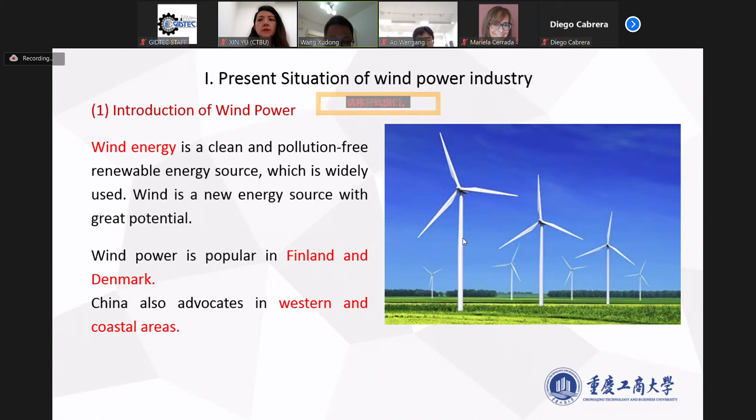In China, the wind turbine is very popular in western and coastal areas.

The working principle of the wind turbine, like the figure shows, is: the wind goes through the rotor, then the gearbox, the electric generator, and the yaw system. The wind turbine rotor changes with wind direction. So these are the main parts of the wind turbine.

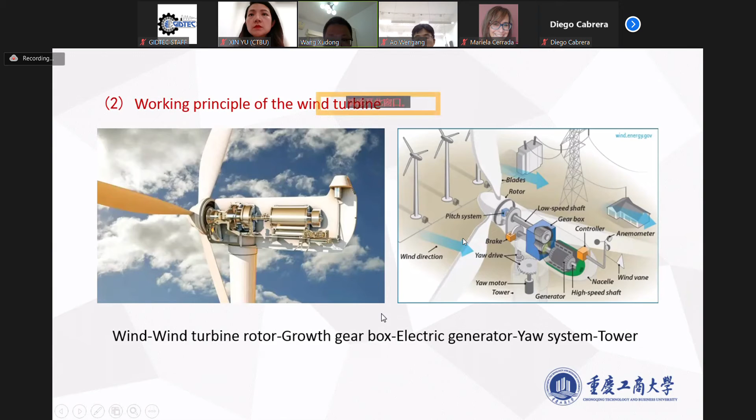The current situation of wind power in China is like this: China generated 8,000 billion kilowatt hours of electricity in 2021.

Thermal power generation with coal is the main part of the electricity, about 71% of China's electricity generation.

The second is hydroelectric power, about 14% of the national power generation. Wind power is about 7%. Nuclear power is about 5%. Solar power is about 2%.

The proportion of clean energy varies greatly in different countries. The proportion of clean energy in China is relatively low compared with developed countries, like Germany. In Germany, wind power and solar power together are about 25%, much more than China.

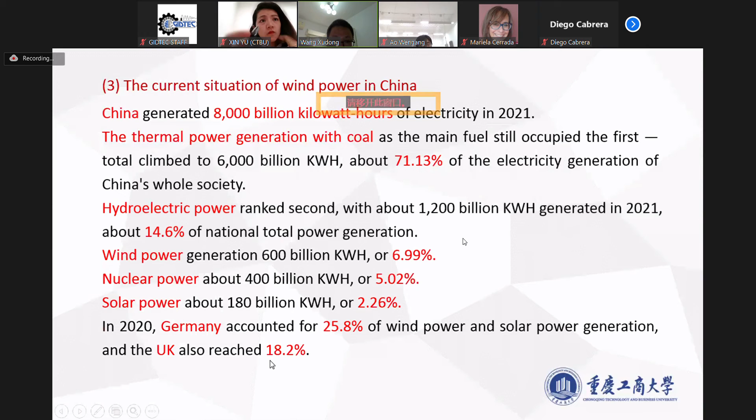In 2021, China's installed wind power capacity reached a new higher level. From the figure, we can see the added wind power from 2011 to 2021 in China, and we can see the growth is very fast year by year.

Among the new installed capacity, onshore wind power accounts for about 70%, and offshore wind power added 25% of the new installed capacity.

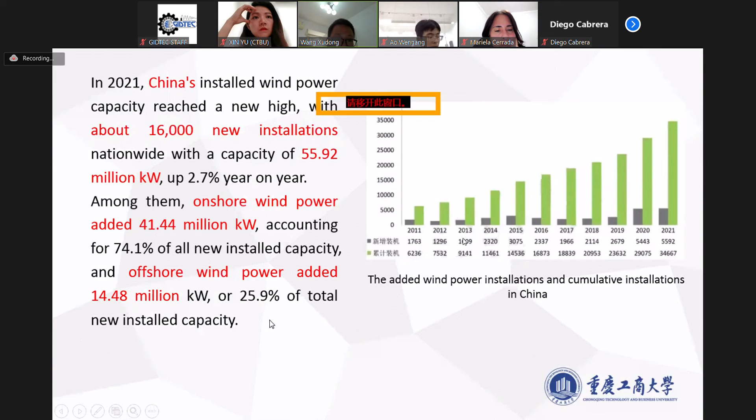In the second part, we will discuss the development trend of the wind power industry. First, I will talk about the global energy development trend.

From the Global Energy Outlook 2022, we can see that there are more energy policies aimed at improving energy efficiency.

In the Global Energy Outlook, it is very obvious that solar and wind power will play a very important role in energy and climate goals. In the long-term projection, we can imagine fast growth in both solar and wind sources.

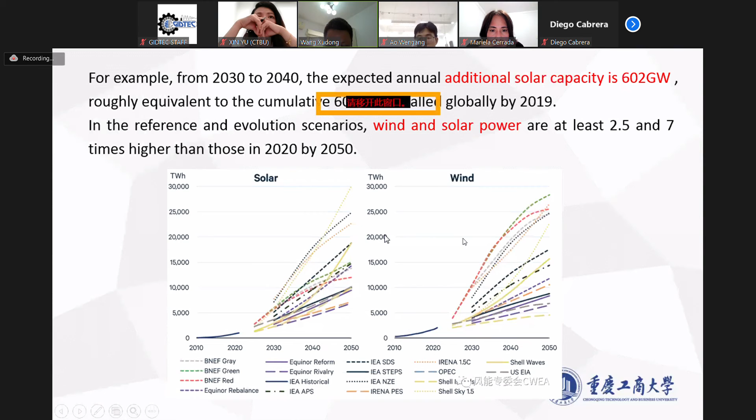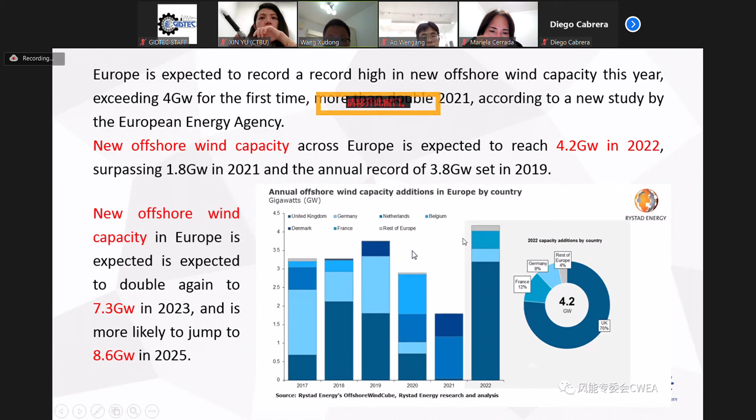This picture is about offshore wind turbine development in Europe. From the picture, we can see that most countries in Europe will put more attention on offshore wind turbines. That is the development trend in Europe.

So how about the development trend in China? The National Energy Administration has released many electricity plans in China. The newly installed solar and wind energy capacity is much more in China year by year.

China has announced the policy about carbon peak and carbon neutrality. To achieve these two goals, we must develop new energy, so this gives much more opportunity for wind power.

In the last part, I will talk about my recent research.

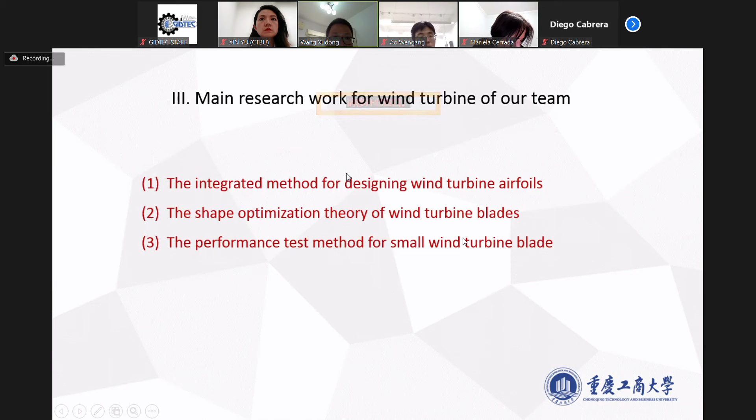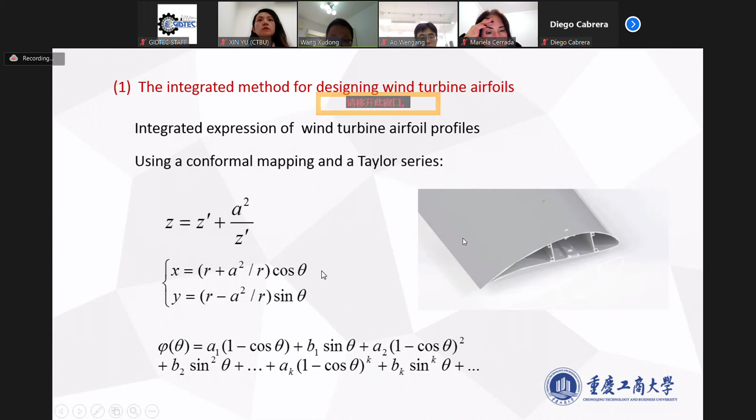To get more wind turbine airfoils with superior performance, one optimized model is presented by our team. Firstly, we presented an expression of the wind turbine airfoils based on conformal maps and Taylor series. This function can express the airfoils.

The optimization model is constructed by our team. The design objective is lift and drag coefficients, and the design variables are the coefficients of the function which can express the airfoil.

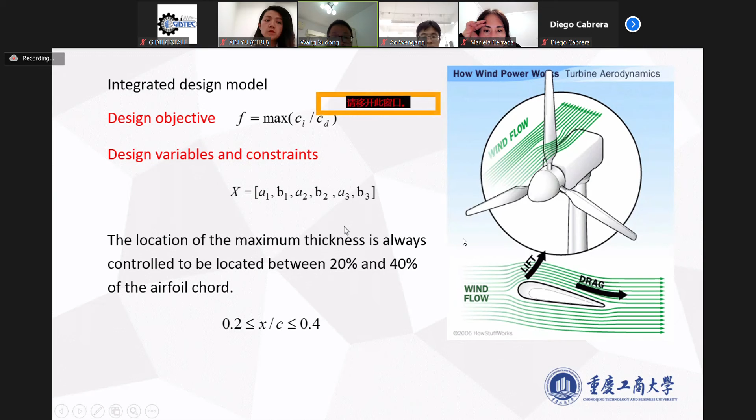With the optimization models, we get some airfoils with different thickness. There are three newly designed airfoils from our research team.

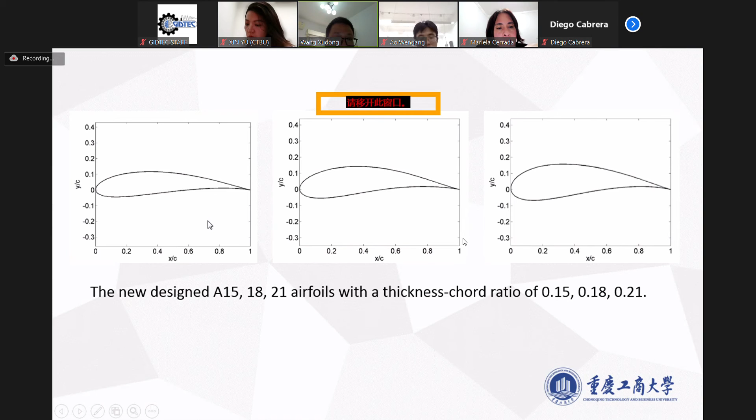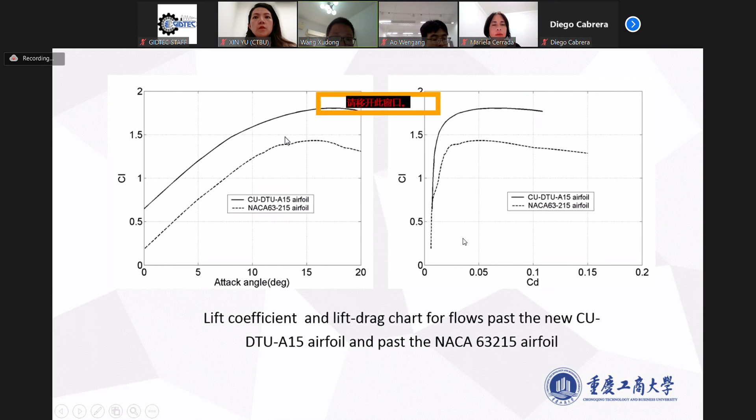To show the performance of our airfoil, we compared it with other airfoils, such as NACA, which is very popular in the USA. The lift of the airfoil we designed is much more than the NACA.

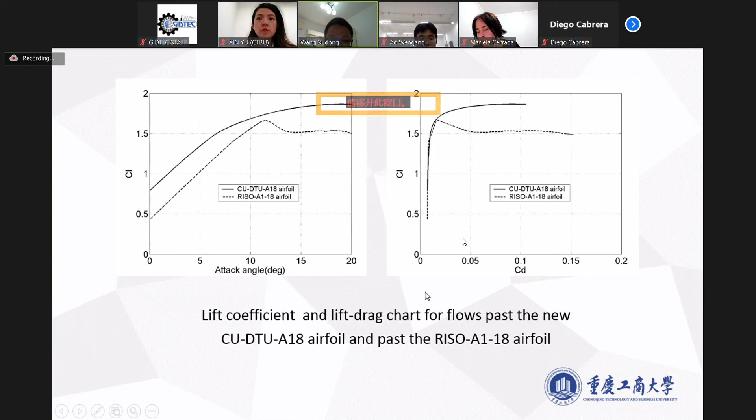The second comparison is with the Risø airfoil, designed by Denmark. We also compared performance with the DU airfoil, designed by Holland. From the comparison, we can find that our airfoil has much more superior performance than these popular airfoils.

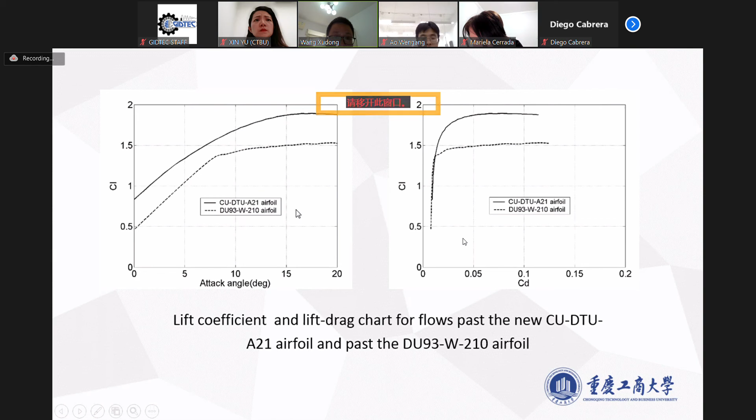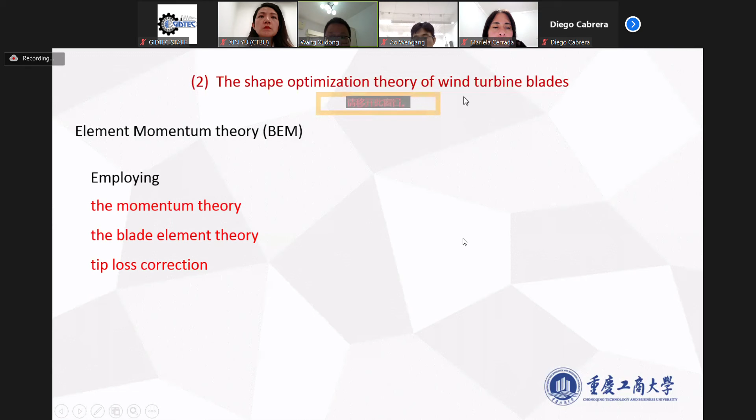The second part is about the shape optimization theory of the wind turbine blade. Based on the three airfoil series, we also consider the dynamic structure models of the wind turbine. In this model, 11 degrees of freedom of the wind turbine are considered by our team.

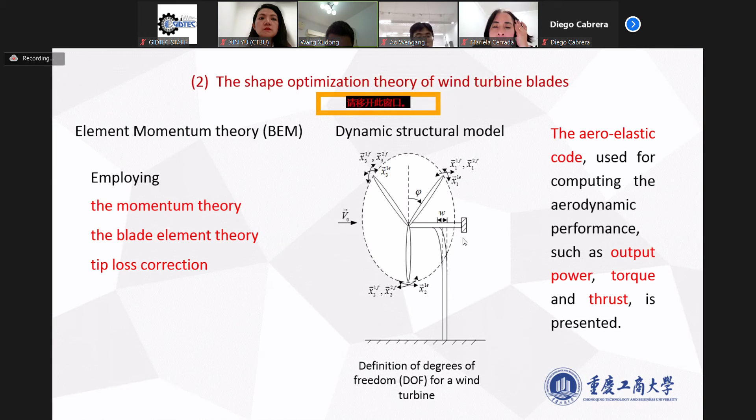The aero-elastic code is designed by our team to compute the aerodynamic performance, such as output power, torque, and thrust. In the optimization model, the objective function is designed based on the cost of energy.

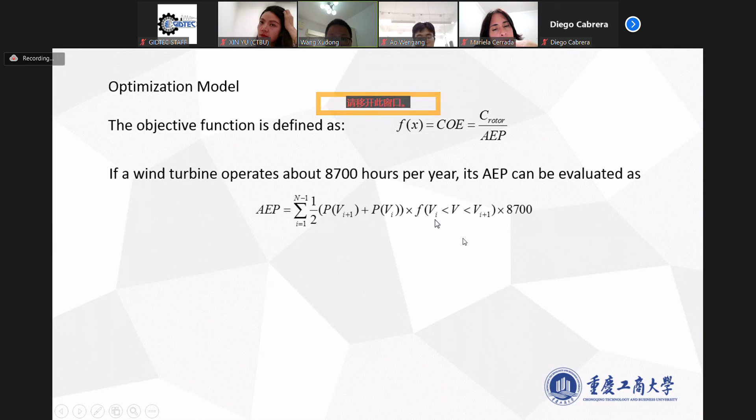First, we compute the cost of the rotor. The second part is AEP, which is the annual energy production of the wind turbine per year. The design variables are the shape of the wind turbine blade, such as the chord, twist angles, and relative thickness.

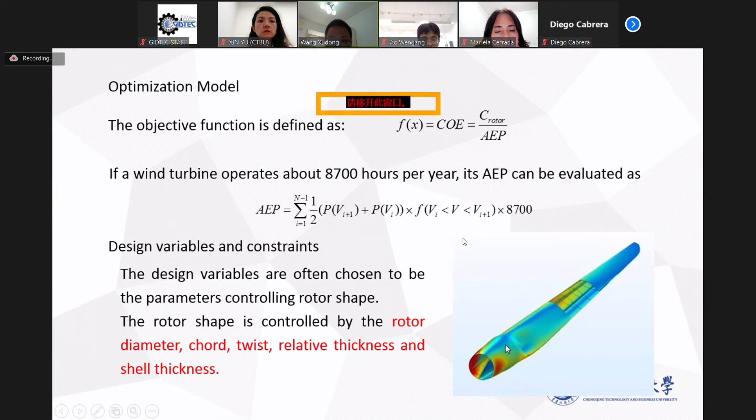Firstly, we make an optimization for a 2 megawatt rotor. This is the result of our optimized rotor.

Firstly is the chord compared between original and optimized rotors. Second is the twist angle. From the picture, we can see the optimized rotor.

The chord of the optimized rotor is reduced compared with the original rotor, which can reduce the cost of energy. This picture shows the power performance of the two rotors.

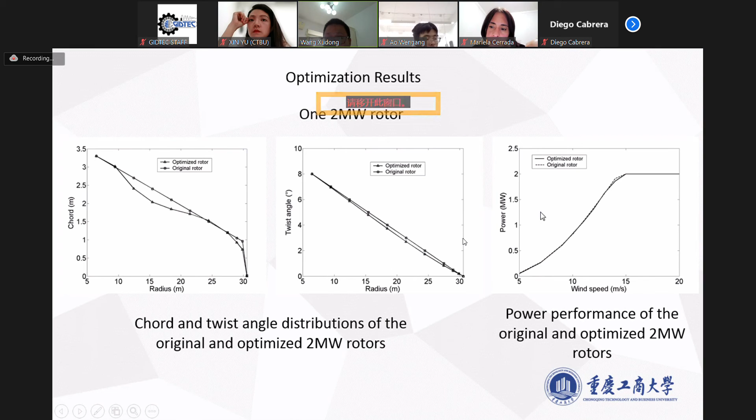We also compared the forces on the wind turbine blade at different wind speeds. The forces in two directions are compared, which shows the optimized rotor is better than the original rotor.

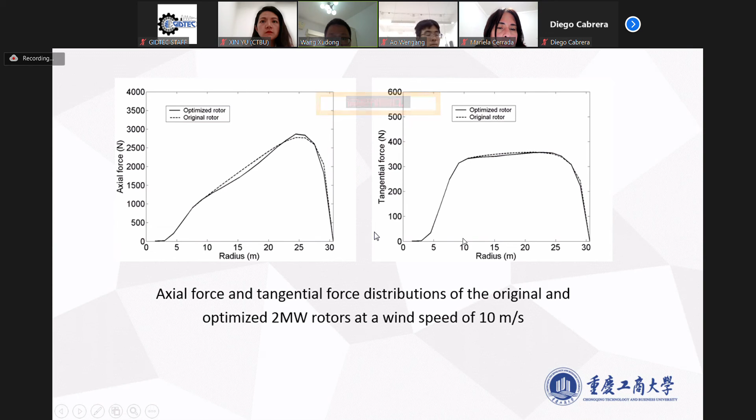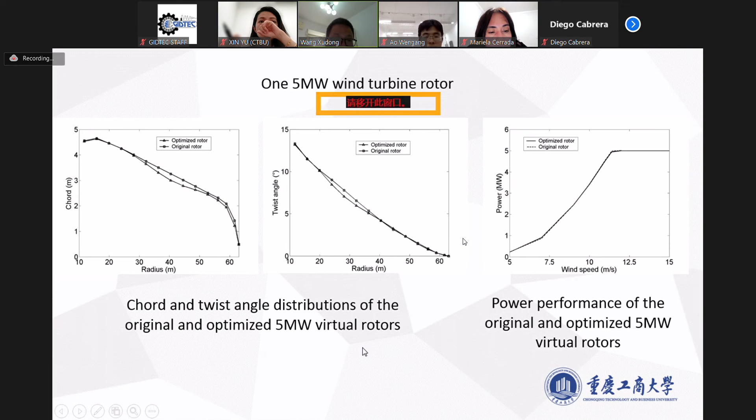For another example, we also designed a 5 megawatt wind turbine rotor. This picture shows the chord and twist angle distribution of the rotor.

The third part is about our performance test method for small wind turbine blades. We know the wind turbine blade is very long—now most wind turbine blades are more than 100 meters—so we made a small wind turbine blade for testing.

A 2 kilowatt small wind turbine rotor was designed by our team, which is just 1 meter long. This is the chord, this is the twist angle, and this is the output power of our designed small wind turbine rotor.

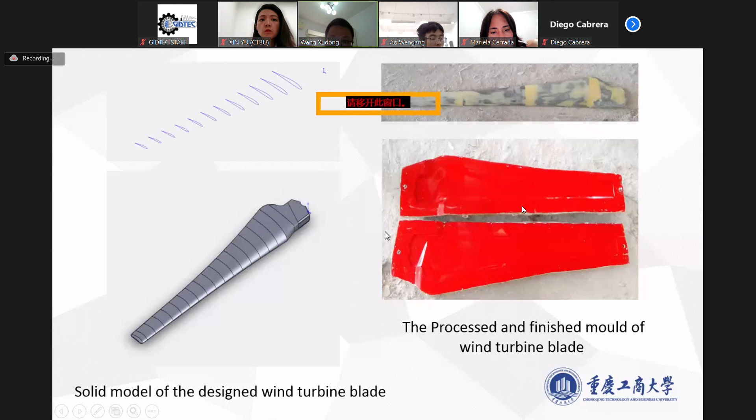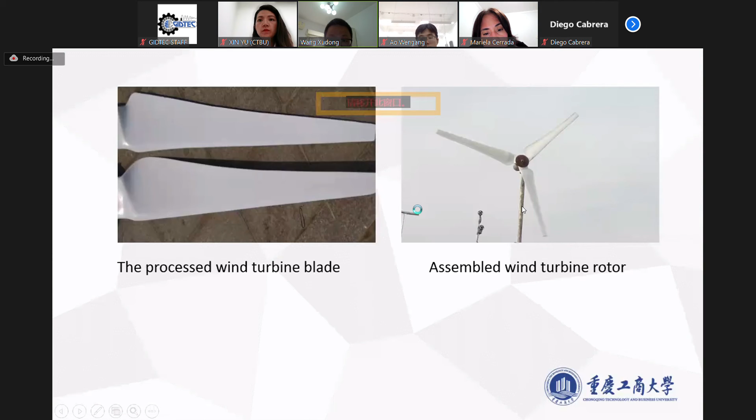This is the blade we manufactured. With this blade, we assembled a 3-bladed wind turbine rotor, and at different wind speeds, the output power was tested.

We also compared the output power with other existing rotors. This is our designed rotor, and this is the existing rotor. We can see our designed rotor has more output power.

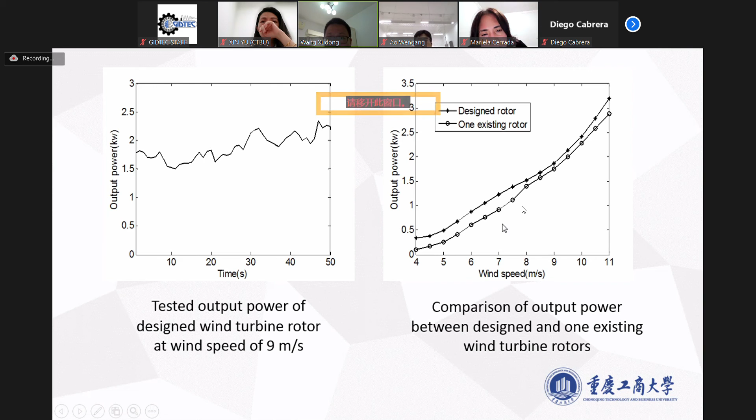That is because our rotor has a very superior performance airfoil, so the output power is much higher than the existing rotors. That's all, thank you.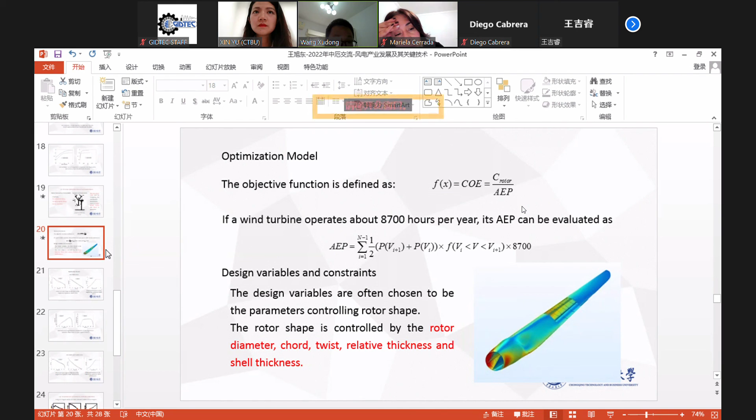These two research areas have also become very important parts of blade research. Considering the cost and the process, intelligent production is also an important research direction. Thank you.

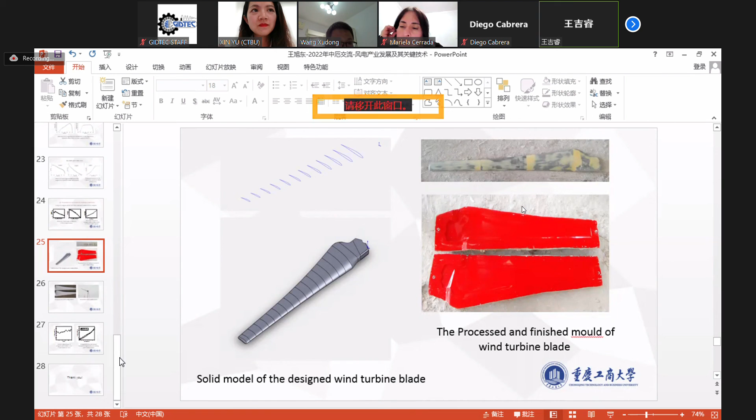Okay, I understand. The second question is, from the report we can see that your team has designed some wind turbine airfoils with superior performance. Do you have test validation or industry applications for the designed airfoil?

We had designed 3 airfoils from our research team. We compared the performance with other popular airfoils. We also conducted wind tunnel tests.

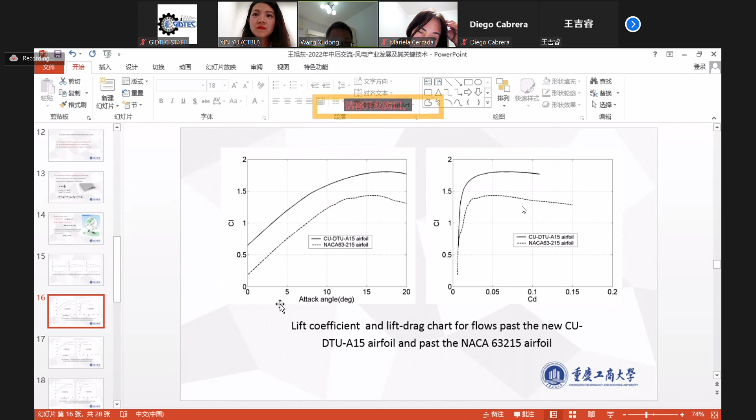The aerodynamic properties are verified and compared with popular airfoils. We also applied for some invention patents to protect our design ideas. Due to the cost problem, I think there is still a certain distance before industry application of our airfoil. Thank you.

Okay, thanks for your explanation, that's all my questions. Any other question, please? Okay, any other question?

Please, yes, thank you Professor for your lecture. Professor, what program do you use to design the turbine?

Okay. For designing the airfoil, firstly we make the function of the airfoil. There are many coefficients about the function, so we selected 6 coefficients about the profile.

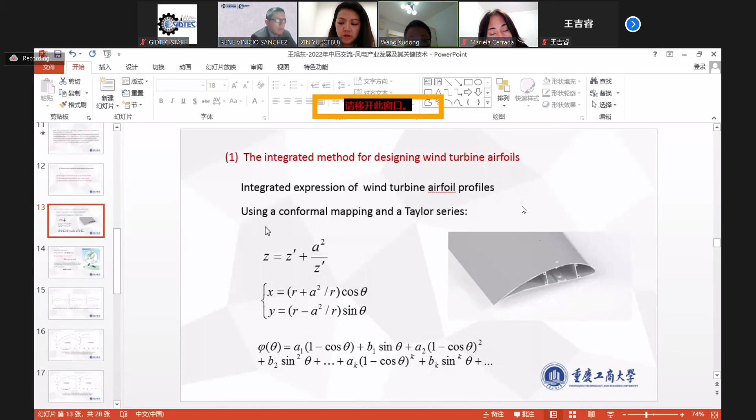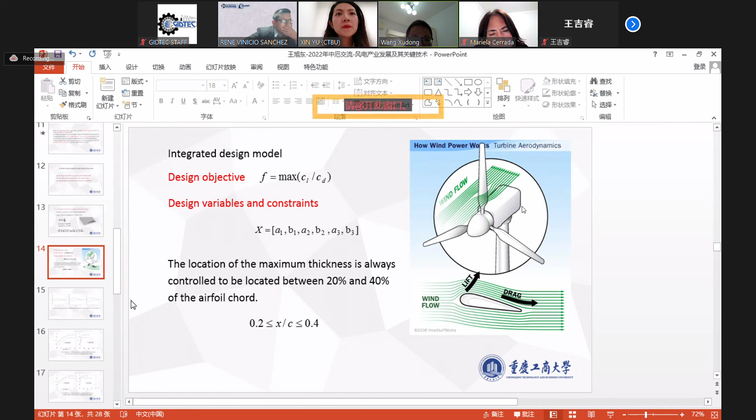Then we created the optimization models of the airfoil. For the solution, we use some optimization tools in MATLAB, so we can get some new airfoils.